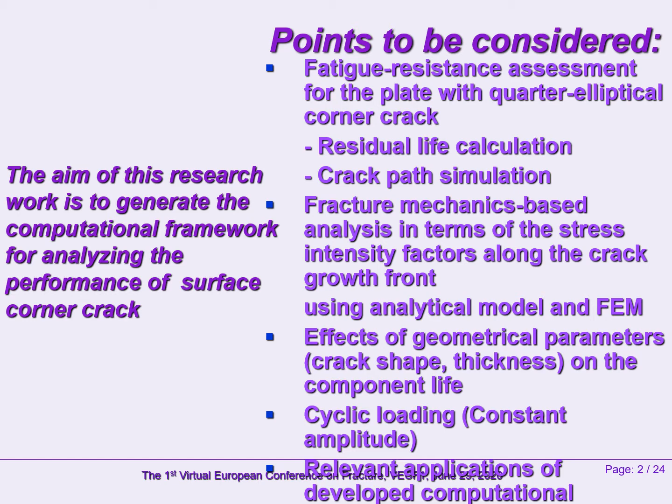Fatigue resistance assessment for the plate with quarter-elliptical corner crack through residual life calculation and crack path simulation. Fracture mechanics analysis in terms of the stress intensity factor using analytical method and finite element method. The effects of geometrical parameters, crack shape, thickness on the component life, cycle loading, and relevant applications of the developed computational framework.

The complex singular stress state field is responsible for the occurrence of fracture due to accumulation of damage in the vicinity of the crack tip. From the fracture mechanics point of view, such driving mode zone should be considered either in terms of stresses or displacement, expressed by equations 1a to 1c and equations 2a and 2b, where stresses and displacements are generated through relevant functions of stress intensity factor.

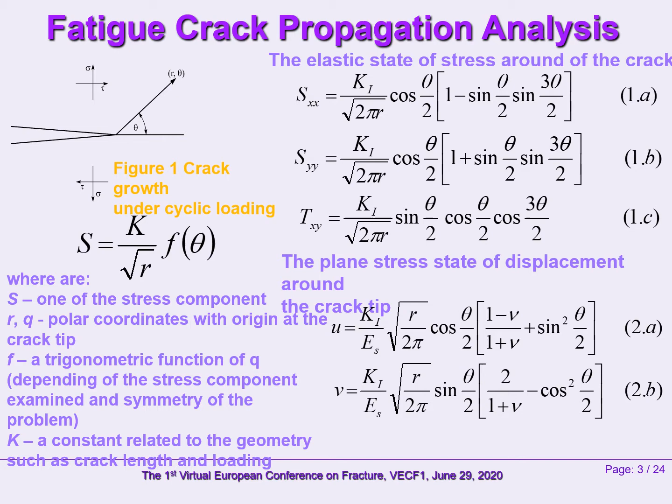The identification of both the local failure modes and their occurrence in time represents crucial information in order to avoid collapse over the structural life, which can be obtained by means of the stress intensity factor using appropriate analytical and numerical fracture mechanics models.

The relationships related to the stress intensity factors for depth and surface crack growth directions are presented by equations 2 and 3, where FQECA and FQECB are the corrective factors related to the quarter-elliptical corner crack. Delta S is applied stress, A and B are depth and surface crack lengths, delta Ka and delta Kb are the stress intensity factor ranges for depth and surface direction.

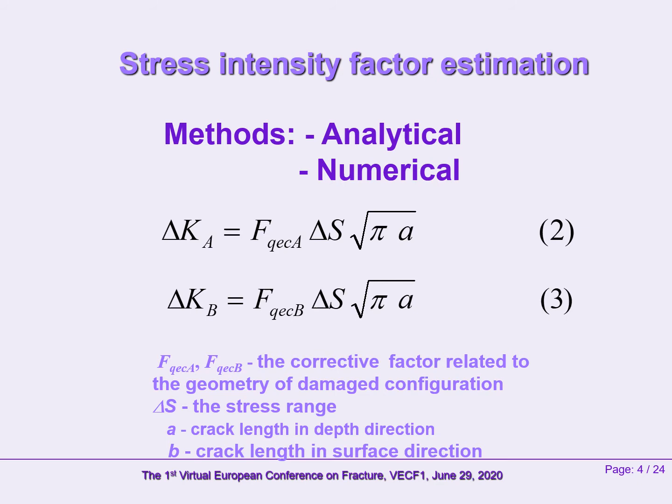This slide presents relationships for the stress intensity factors and relevant corrective functions related to the plate with quarter-elliptical corner crack, in which the crack length in depth direction is shorter than that in surface direction. Where A and B are depth and surface crack length, T is the thickness of the plate, delta S and delta P represent applied stress and force, and delta K is the stress intensity factor.

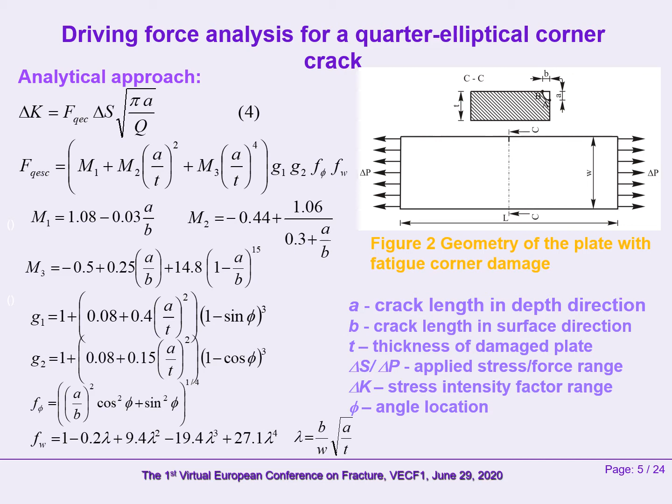The detrimental effects of microconcentrators caused by stress gradient in the zones with initial flaws can be avoided during service operations of structural components if such safety-relevant mechanism is tackled through suitable fracture mechanics models. Thus, failure resistance analysis should be performed in terms of crack rate as a function of stress intensity factor range.

The propagation of surface corner crack is tackled herein through crack growth rate in two depth and surface crack directions, expressed by equations 5 and 6.

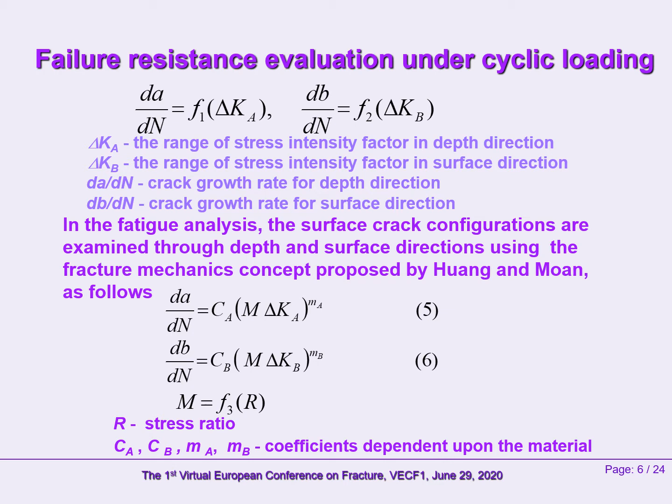In the frame of fatigue-resistant design, the number of loading cycles to failure is evaluated by integrating the crack growth rates for relevant initial A0, B0 and final AF, BF crack lengths in depth and surface directions.

Bearing capacity of structural components with fatigue damages may be often threatened due to complex interaction between service loadings and environment. Such effect is here analyzed through the fracture mechanics parameter M expressed by equation 9, where R is the stress ratio, beta and beta 1 are material parameters experimentally obtained.

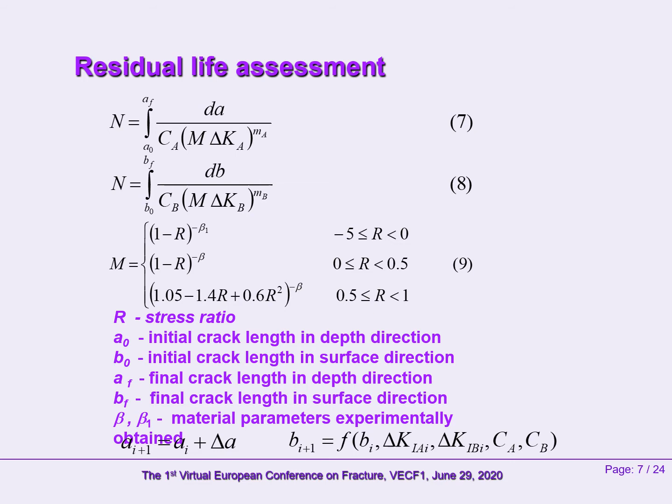Then, by employing suitable fracture mechanics concept proposed by Huang and Moan, the crack growth rate is evaluated. Also, the fatigue strength is assessed in terms of number of loading cycles in depth and surface crack directions. Moreover, the same crack growth concept was employed for evaluating the crack path under cyclic loading.

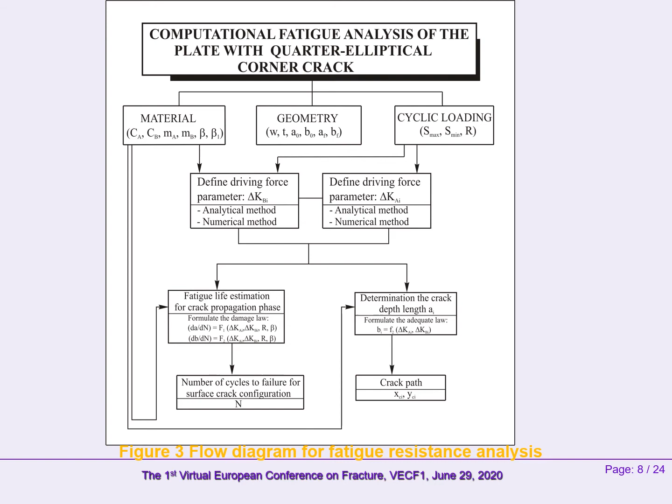Now, some applications will be tackled in order to assess the predictive capability of the developed computational fatigue performance framework. Firstly, fatigue resistance of a dog bone configuration with quarter-elliptical corner crack shown in Figure 4 is theoretically tackled by means of the residual life. The failure analysis was performed by employing loading, material, and geometrical parameters presented on the left side of this slide. It is worth mentioning that cyclic loadings with two different stress ratios, R equal to -1 and 0, are herein tackled.

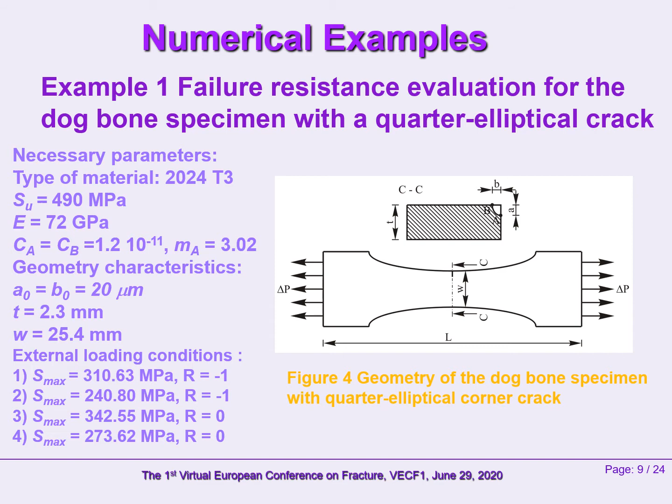Estimated number of loading cycles in the case of R equal to -1 as a function of depth and surface directions are shown in Figure 5AB and Figure 5CD for two different levels of applied stresses. Furthermore, for three different stress levels, the number of loading cycles evaluated through the developed framework is compared with those experimentally tested by Grover and colleagues.

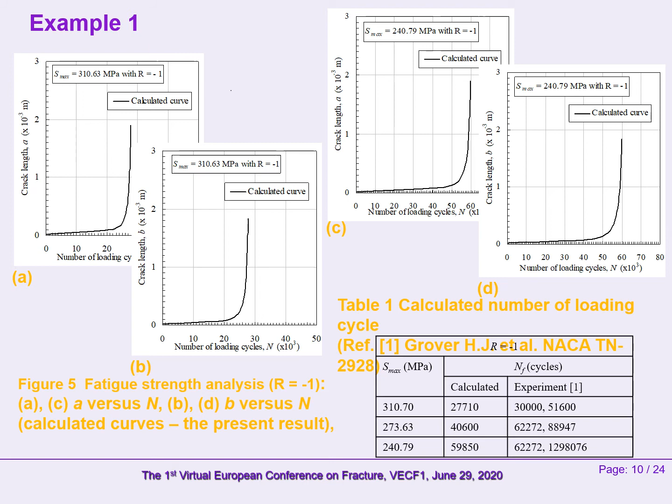Now, for the same damaged configuration and stress ratio R equal to 0, the evaluated life versus crack length in depth and surface directions through the developed framework is shown in Figure 6AB and Figure 6CD. Also, relevant comparisons tackled in Table 2 indicate good agreement between different fatigue life results.

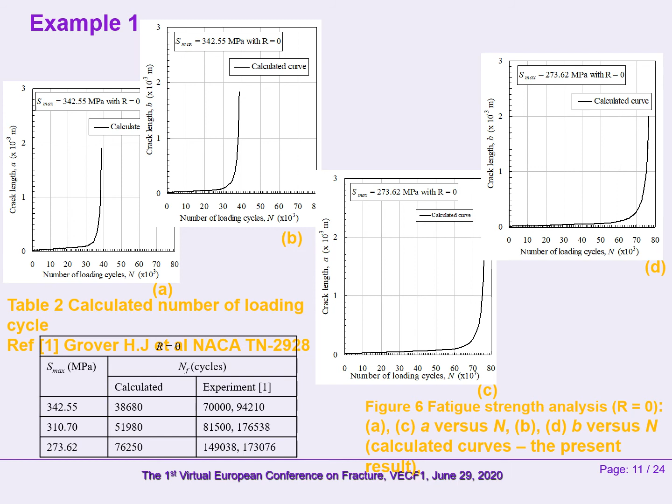Now, the failure strength of the plate with quarter-elliptical corner crack, shown in Figure 7, is evaluated taking into account the effects of the thickness and width of the plate. Relevant fatigue parameters related to loading, material, and geometry of the plate are shown on this slide.

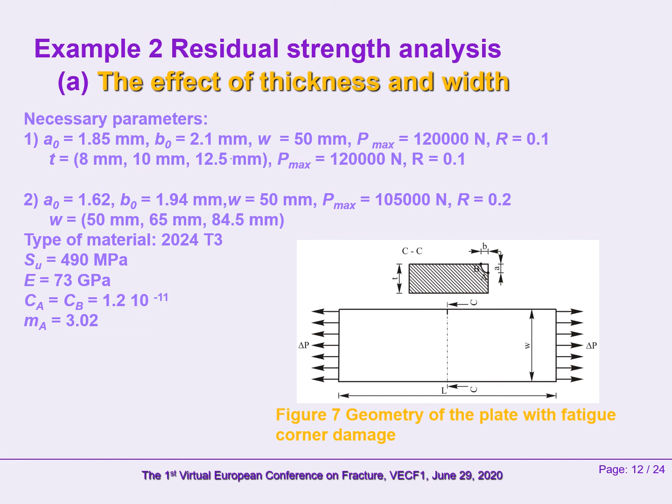The evaluated number of loading cycles as a function of crack length in the case of three different thicknesses, as well as three plate widths, are shown in Figure 8AB and Figure 8CD for depth and surface crack directions. Comparisons presented in Figure 8AB and Figure 8CD show the thickness and width of the plate may rather threaten the residual strength of the plate with surface corner crack under cyclic loading.

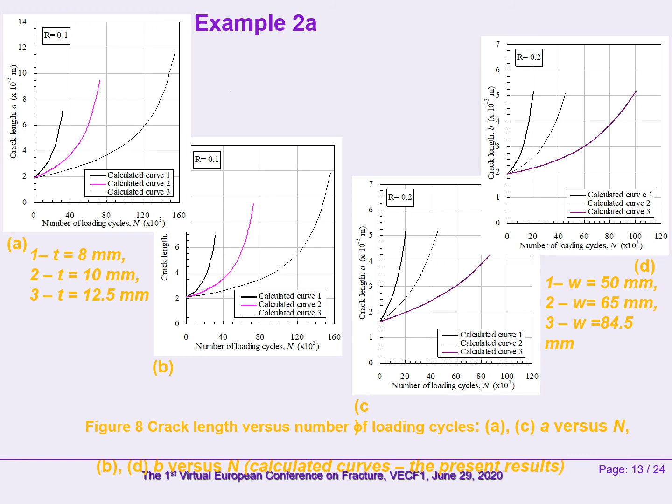Through this research work, the effect of crack shape is also taken into consideration. Thus, the failure in the case of three different quarter-elliptical crack configurations, B0 equal 0.9 mm, 1.5 mm, and 2 mm, is tackled through residual life by adopting loading, geometrical, and material parameters which are shown on the left side of this slide.

For different initial crack lengths in surface direction, the evaluated number of loading cycles as a function of crack length related to the depth and surface directions is shown in Figure 10A and 10B. From such figures, it can be observed that the shape of crack-like flaws may significantly affect the fatigue strength of the plate.

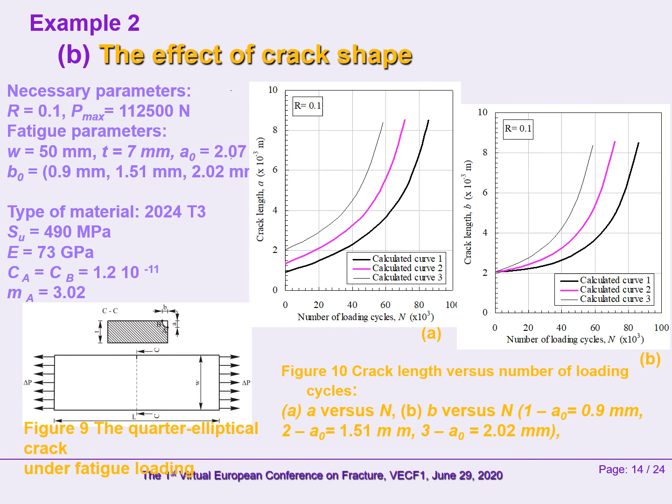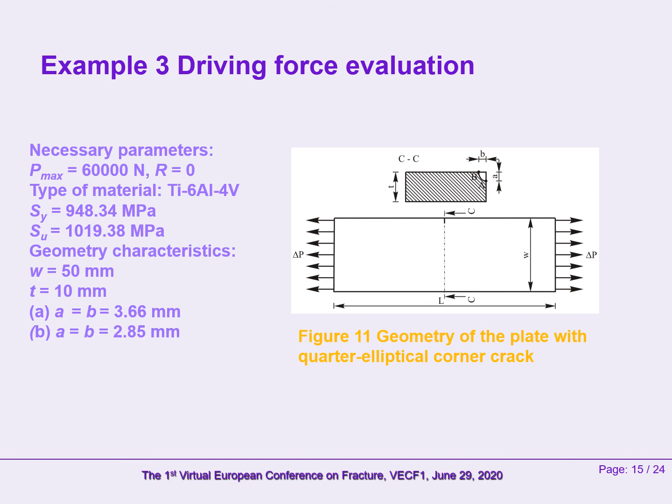In this research, since a part-through crack configuration is tackled, the singularity of the stress field is analyzed through the three-dimensional finite element method. Thus, for different crack growth increments, the stress state field is numerically analyzed step by step through the stress distribution and stress intensity factor.

A representation of the stress distribution in the case of crack length equal to A equal B equal 3.66 mm is shown in Figure 12. Further, numerically obtained stress intensity factors are compared with those evaluated through equations 2 to 4, together with those employed to calculate relevant parameters M1, M2, M3, G1, G2, and FW, as shown in Table 3.

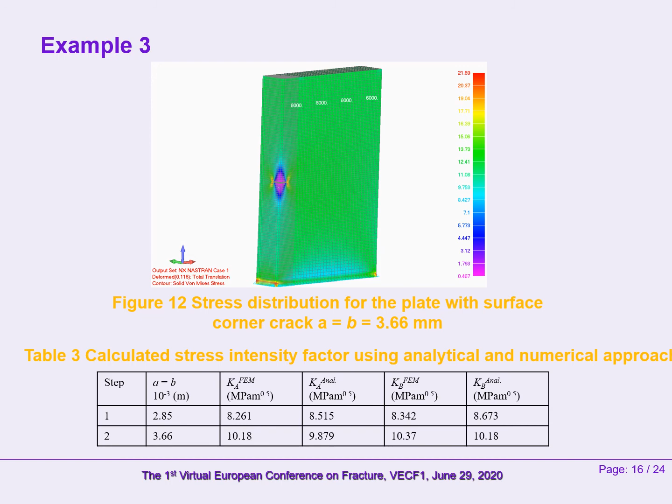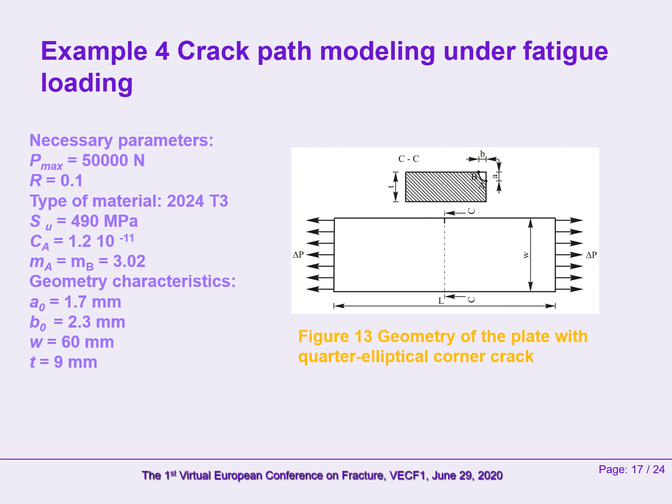According to the developed fracture mechanics framework, the crack path simulations are performed for initial crack length in depth and surface directions equal to 1.7 mm and 2.3 mm by evaluating relevant stress intensity factors and crack growth rates through equations 2 to 4 and equations 5, 6 together with equation 9.

Modeled crack paths for 10 different depth crack lengths are shown through 5 calculated curves in Figure 14a and 14b, where vertical and horizontal axes match with the front face and left edge of the plate.

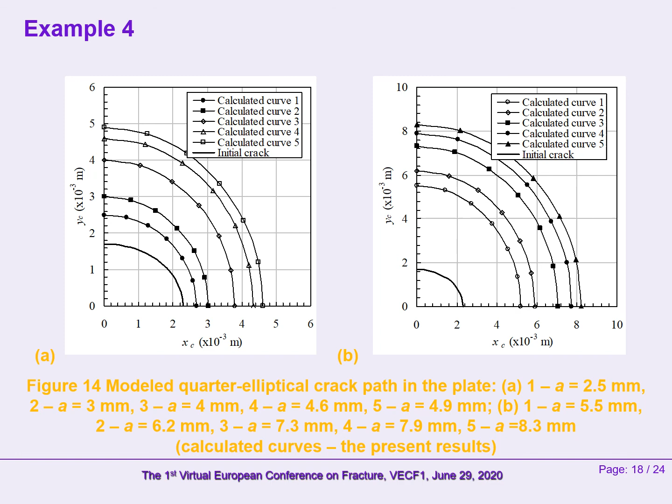Finally, let me conclude. Among different sources of damage under cyclic loading, fatigue due to crack-like surface flaws is one of the most safety-relevant mechanisms in plate-type structures. Thus, for this research work, a novel computational framework is developed for evaluating the performance of quarter-elliptical corner cracks.

The implementation of the Huang-Moan failure concept, extended for surface flaws, together with relationships for stress intensity factors, provides good correlation with the experimental data. An important benefit of the analytical-numerical framework presented is that it can assess the failure resistance under cyclic loading simultaneously through residual life of the component and the crack path.